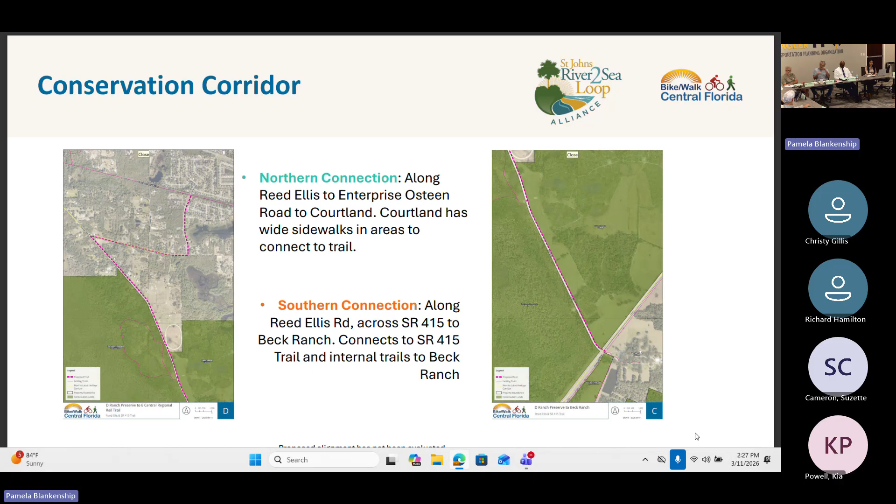I have a question. I know you live in that area - I'm trying to figure out exactly where Beck Ranch is in relationship to the overpass I'm very familiar with on 415. How many miles south, I guess, 3 or 4 miles? Yeah, it'd be south of it, very close to.

So here's the bridge up here, here's the bridge right here, and here's another underpass down by the canal, down by the river. Come all the way down and connect to it and then go back - that's 6 miles round trip probably.

And then celery, what I was talking about earlier - this is celery. This is currently under construction for a trail that will connect to the wide sidewalk at that intersection and connect to 415 and north. That'll be much welcomed - we were all very happy when it broke ground. I served on the Seminole County Parks and Rec Advisory Board, so I helped prioritize that trail.

Thank you. You're welcome. All right, any other questions? No. Okay, good job. Thank you.

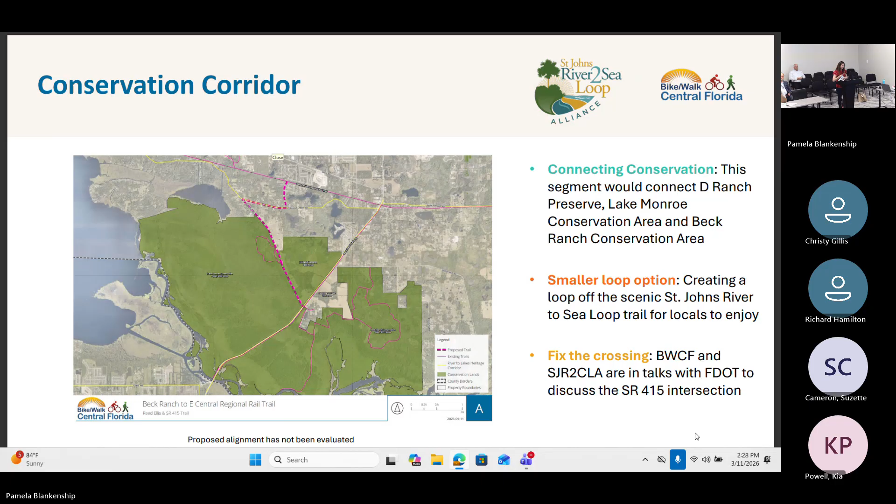Thank you. Our next presentation is by Todd. Oh, you did say you're doing two. I did, sorry. Do you want to sit down? No, no, stand up. I mean, I can be as formal or informal.

Okay, I'm going to run right into my second presentation then. This is an update on the Best Foot Forward Pedestrian Safety Program that is being administered in Volusia County and Flagler County. The Volusia County program right now is funded by FDOT. The Flagler County component of that program is funded by the TPO. So thank all of you for making that a priority.

And we're doing some really great work in Flagler County, and I can't wait to share with you what we've been up to. So if you're not familiar with our program, I'm going to give a quick overview.

This program was designed based on a high visibility enforcement on driver compliance with pedestrian right-of-way laws study back in 2013. What this NHTSA study basically looked at was how engineering, enforcement, and education could improve driver compliance at marked crosswalks, basically stopping for people to let them cross the road as the Florida law requires. We do all of these components as well as evaluate the driver yield rate, and I will go over how we do that in a minute, but all of that is compiled into the program.

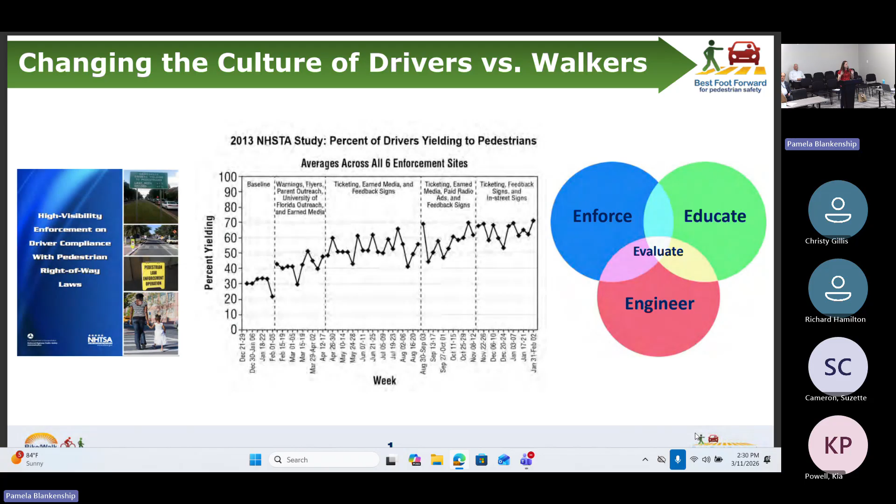So we use those 3 E's and that 4th E to determine which enforce, educate, or engineer we need to more focus on to get drivers to stop for people in marked crosswalks.

We are doing this now in a very large footprint. We started out in Orange, Seminole, and Osceola counties originally, then grew to what you see is the northeastern expansion. So this year we're all the way up in Jacksonville. Very excited. And we are all the way west as Polk County. Maybe Tampa will be our next region, not really sure.

But here's all the people that we work with. We bring together people from Public Works, Transportation Planning, our law enforcement partners, school districts, the health and advocacy groups that need to be a part of this, and really anybody who's interested in pedestrian safety, regardless of what your profession or what you might be working on.

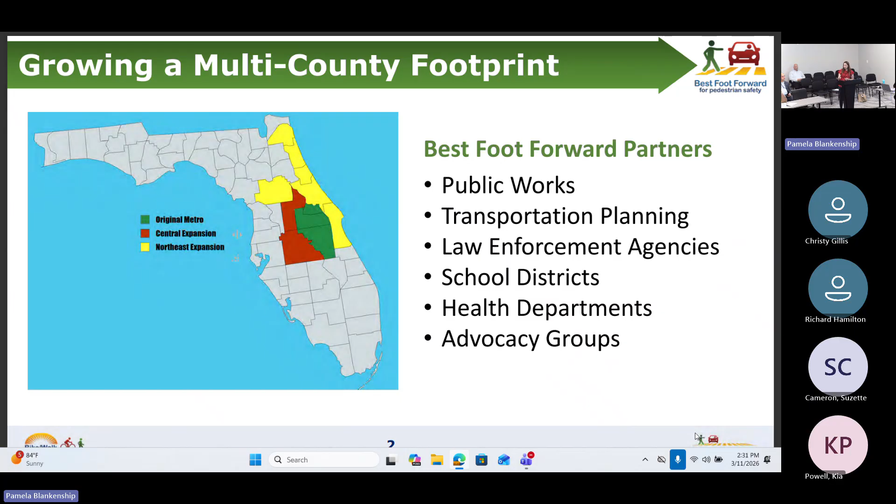So we bring all of these people together to have these robust conversations, talk about the data, talk about the recommendations and options, and it's those program partners that really guide how our staff and we use our resources to give the information back to the partners that they need to improve driver compliance and pedestrian safety.

So our evaluation methods are pretty simple. We put our foot in the crosswalk to show intent to cross the road. We do so by marking and flagging out what we call our dilemma zone, which is our safe stopping distance. So we don't just jump out in front of cars. That's super dangerous and against the law.

So don't do that. We mark out either with a flag, or if it's been properly designed, it has advanced warning signs that meet these distances, and it's based on the speed that's posted. We tend to give drivers the benefit of the doubt and push that out 5-10 miles per hour. So we'll extend that even so to make it very obvious and give the driver plenty of time to stop for us. But we head out, put our foot in that marked crosswalk.

Driver can do one of 3 things. They either stop for us and patiently let us cross the road. They slam on their brakes and they're like, oh my God, someone's there. Give you the finger, the nice wave, either one or both, right? Or they just blow right by you, right? We've all been there and experienced probably every single one of those scenarios.

So our data collectors mark that down. They mark whether or not that driver had to hit their brakes and had a short stop, whether or not they gave the pedestrian plenty of room, right? You hate to feel that car on your leg as you're walking or your body, right? So how much space did they give you?

Then we'll take observations of other users in the area. How many people are walking? How many people are biking, using other types of devices? Where are they crossing? Are they using the crosswalk? Or are they mid-block crossing? So we look at all the various factors. What are the land uses around there?

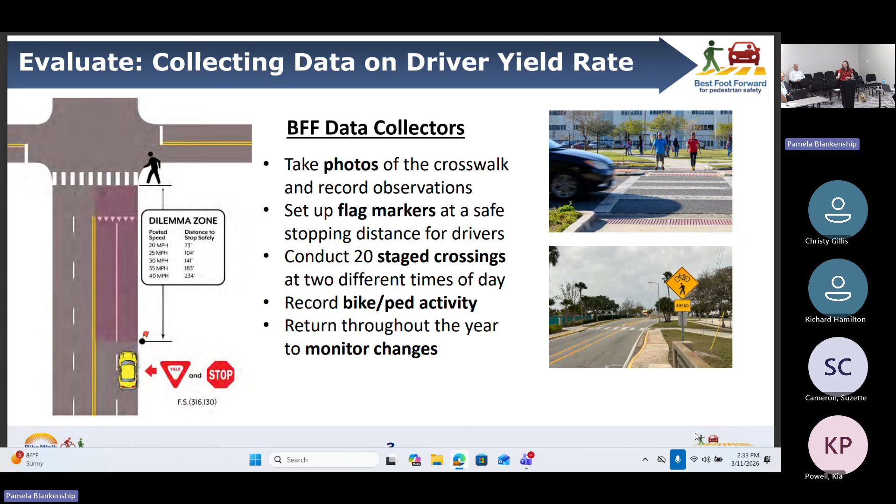So I'm going to give you some insights on the program. This is program-wide data. We monitored over 100 crosswalks across the 7 counties that we were operating in last year. And of those, I'm going to go through some of our engineering highlights. I also have education and enforcement highlights for you all as well.

When you start with delineator posts near crosswalks, it was the most effective low-cost engineering solution that improved the driver yield rate.

On average, almost 30% improvement with little flex posts. Super simple, but that vertical deflection, that vertical piece of plastic makes you go, whoa, I need to slow down, I don't want to hit that. And so that's why we're seeing those increases in the driver yield rate.

We've also had a lot of partners see that the partners that piloted this originally, these flex posts aren't getting struck like a lot of naysayers would say, oh, I've got to replace them all the time. That's not what we're finding. What we are finding, though, is that it's a great, cheap solution to help protect people and increase the driver yield rate. So we're using this more, and partners are recognizing that, starting to install them more and use them more in those areas.

Speed humps ahead of the crosswalk actually have a higher driver yield rate than raised crosswalks themselves, because the driver is slower, recognizes that someone's there, and is more likely to stop than if they were already heading over that hump. We've done this now in 4 different locations at, I think, 6 or 8 different crosswalks - I need to verify that. But we now have enough of a sample size to know that the speed hump ahead of a crosswalk, instead of the raised crosswalk, is really the way to go. Downtown Kissimmee has that, so that's a really great place to look at a before and after example. And then by beacon type, we were able to really pull out all the data to show which one's effective and which ones are not.

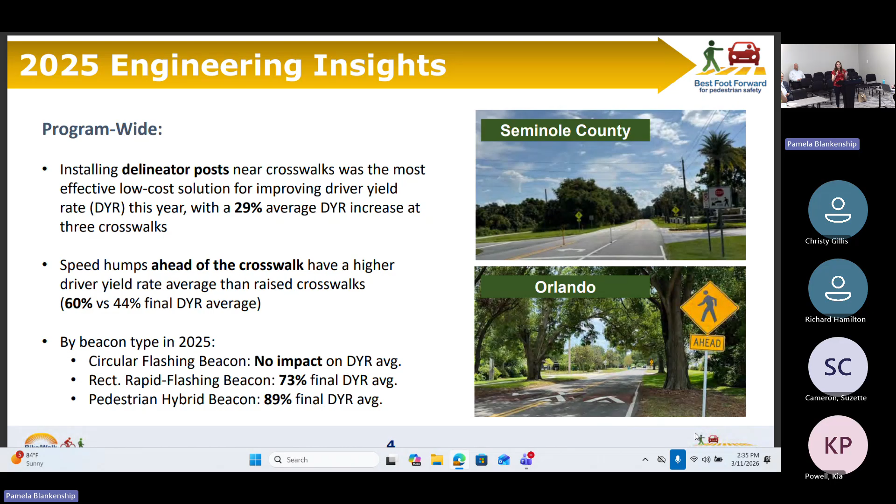I'm not sure where you all have one here - I know there's one in Seminole County and several in Orange County, one in front of Mainland High School, on ISB. So these are more prevalent, coming more to FDOT's toolbox to be used to get people across these state highway systems safely.

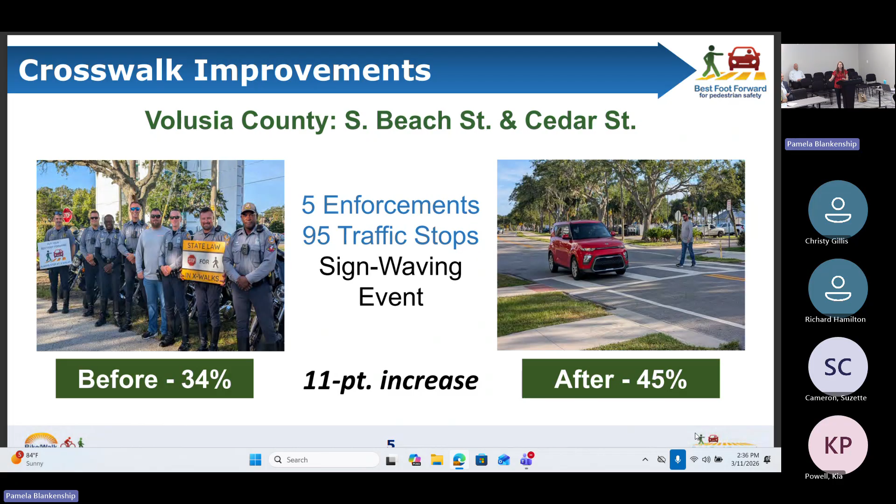We have been monitoring South Beach Street and Cedar Street. This had 5 enforcements with over 95 traffic stops, and a sign waving event was conducted here. When we started, we had a 34% driver yield rate. When we ended after doing all of that work, it was at 45%. So just with enforcement and sign waving, we were able to increase the driver yield rate - no engineering necessary, just some boots on the ground, literally and figuratively.

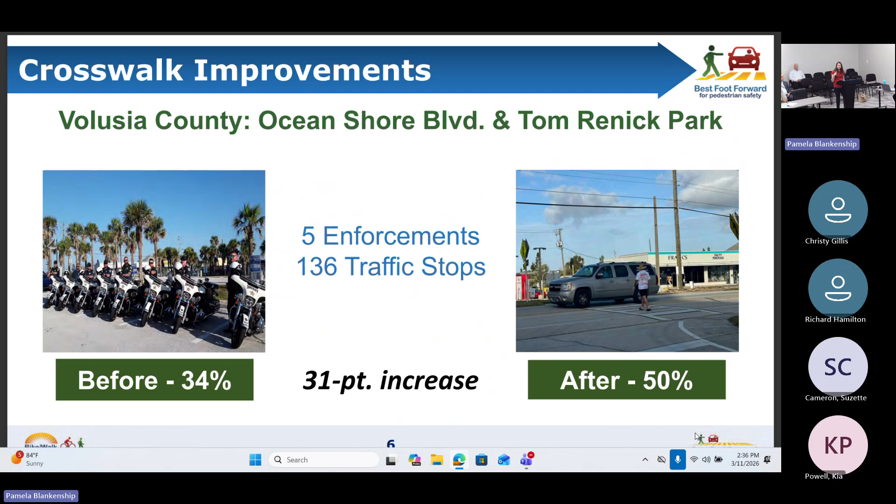Over at Ocean Shore Boulevard and Tom Renick Park, Volusia County Sheriff's loves to enforce this location. They've done it 5 times and handed out a whopping 136 traffic citations or warnings. It was at 34% before, and now a 31% increase, because they've been consistently out there every enforcement. So hopefully drivers by now recognize that they've got to yield to people trying to cross.

Over in Flagler County, Ocean Shore and South 3rd Street has a PHB that was installed while we were taking data, so we got the before data. This is with the RRFB that was temporarily put in - that was at 63%. When they put in the PHB, it went to 91%. Yes, so the before and after numbers are the average of 5 samplings. Correct.

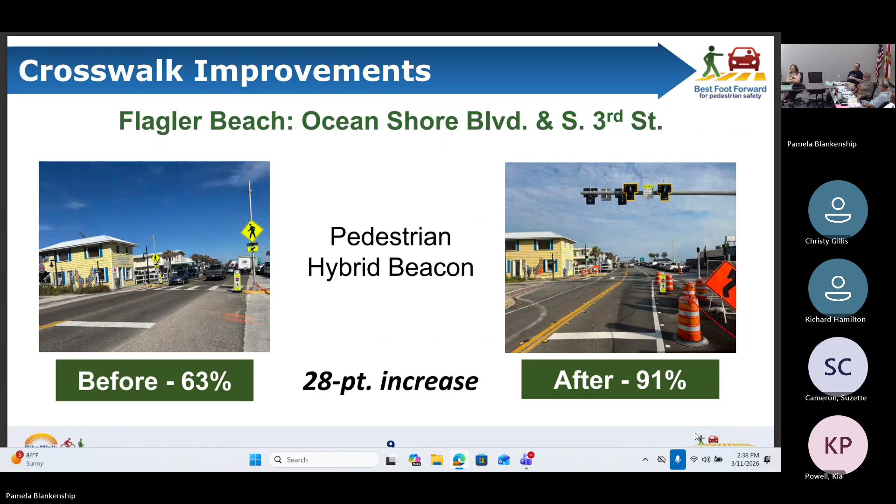So I did a bike ride this morning and I was at Old Kings Road and Town Center Boulevard. Right now that sidewalk is closed. It's been closed for three days, so you can't get from one section of the Lehigh Trail to the second section. We had to take the road and cross because it's shut down. I think that's pretty dangerous, but we had no choice because then there's the 95 bridge. You can't just go around it, it's pretty bad.

And then my second, on the same bike ride, we went to State Road 100 and Belle Terre, which is in the middle there. We crossed on 100, crossing Belle Terre, and that car was maybe less than 10 feet from the bikes. And that's a 4-lane crossing. They have a lot of notice that we're coming, but they're cutting in every chance they get. So it was not dangerous, but it was close.

I'll run through the project and take questions as we go or at the end, whatever works best. What I'd like to do is go through some of the improvements we're making out there—a lot of safety improvements for all users, pedestrians, bicyclists, drivers. As you know, we've got a lot of students out here, not just Embry-Riddle but Mainland High School, so we're doing a lot to improve safety.

Project overview: we're going to mill and resurface the road from Beville Road to Mason Avenue. If you're familiar with it, there are some patches desperately in need of new pavement. From International Speedway—let me back up a little bit. In order to take advantage of the funding and leverage our ability to make these improvements, we're producing 3 separate construction projects, chopping it up into smaller pieces, which I'll go through.

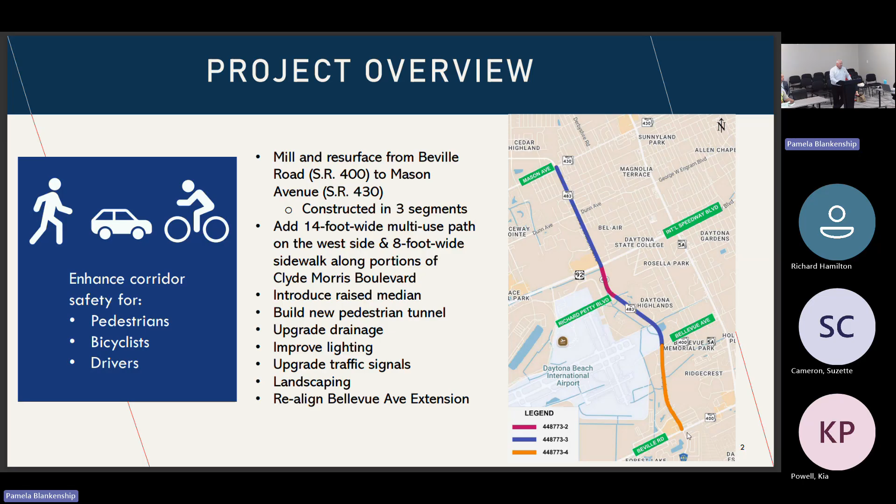I'll walk each of you through the different segments. Generally speaking, from International Speedway to Beville Road, we're adding a 14-foot multi-use path on the west side of the road and an 8-foot sidewalk on the east side. We're reducing lane widths in some cases down to 11 feet, putting in raised medians, doing landscaping, upgrading traffic signals to mast arms, and bringing pedestrian push buttons at all signalized intersections up to current standards, along with ADA ramps. We're also adding a pedestrian underpass at Embry-Riddle Aeronautical University—rather unusual for this part of the country, but we're going to do it.

We'll be keeping the overpass as well—yes, they will keep it. The ROTC has to use that, from what I've been told.

As I mentioned, we're breaking this into 3 separate segments. The first segment is from Richard Petty Boulevard to International Speedway Boulevard. The canal on the west side there, by the Embry-Riddle parking lot, used to be their backup or practice soccer field. We're going to pipe that canal, and once it's piped and covered, we're going to put in a 14-foot trail along that whole side of the road from International Speedway up to Richard Petty.

We're going to reconstruct the signal at Richard Petty—it's string pole now, and we're going to use mast arms there, and upgrade all the pedestrian push buttons. While we're doing that, we're going to work with the City of Daytona Beach and Florida Power and Light to relocate some utilities where the tunnel's going to go, which is in Segment 2, so we want to get ahead of that in advance.

Our current schedule: we're going to open the bids in fall of '26, so sometime after late summer, early fall. We hope to get construction started—I've got a slide later that shows the construction sequence—but we're going to try to get under construction by December of this year. The current estimated cost for construction is $9.8 million.

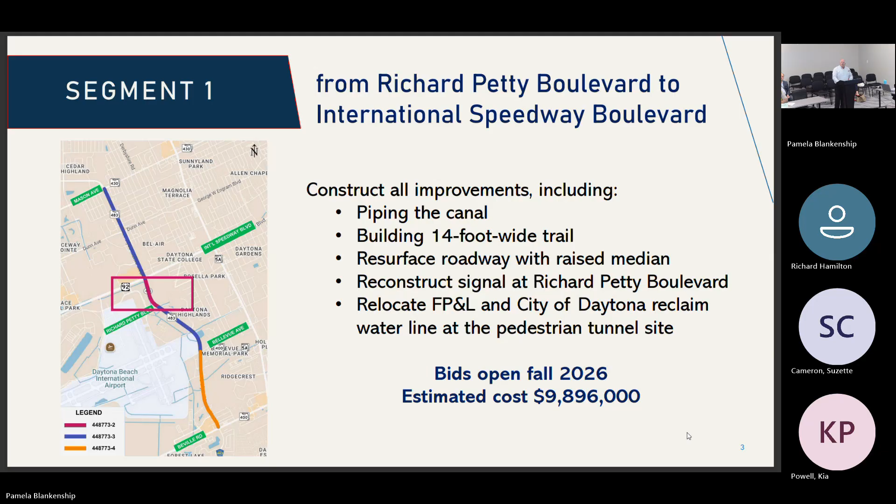Segment 2, we broke it up into two pieces for presentation purposes, but it's one project. Segment 2A is from Bellevue/Aviation Parkway to Richard Petty, so we're closing that gap. A lot of the same features are going in there: the 14-foot trail on the west side, the 8-foot sidewalk on the east side, resurfacing the road, and adding curb and gutter where it's currently a rural section.

We're building the pedestrian tunnel at Embry-Riddle. We did a pedestrian count there a couple months ago—one count on Tuesday and one on Wednesday. Tuesday we had near 1,500 pedestrian crossings at that main intersection, and Wednesday we had almost 1,700.

That count was from 8 a.m. to 4 p.m. because most students are done by then, though as you know there are nighttime events at Embry-Riddle too, so there's a great need. This is probably one of the busiest pedestrian intersections I've seen in the district—I can't say for a fact it is, but I don't know if I've ever seen 1,700 pedestrians crossing from 8 a.m. to 4 p.m. So you can see the need.

Also, last October, unfortunately, 3 students were hit at the crosswalk. They were in the crosswalk doing the right thing, and unfortunately a driver went through the red light and struck them.

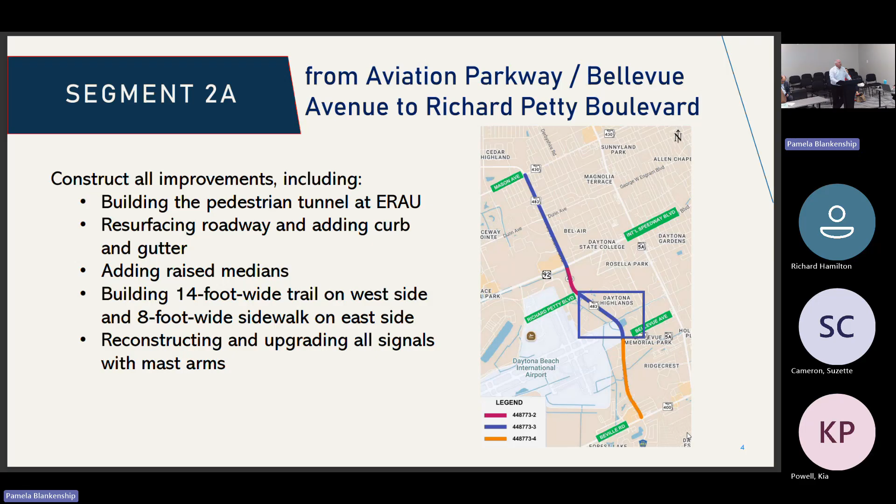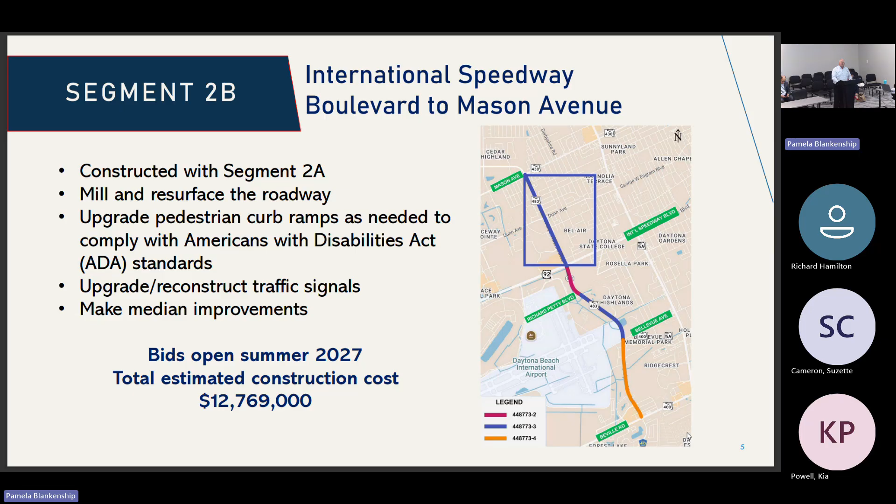This is a very important project to us and the university. Segment 2B is from International Speedway North to Mason Avenue. We're doing median improvements up to the hospital's main entrance, and more sidewalk from where West Marine is, from that gap up to the intersection. That won't be 14 foot, but it's sidewalk improvements, closing in that little bit of canal right there, upgrading the traffic signals to two mast arms, and milling and resurfacing the road all the way up.

This is about where the tunnel is going to be, looking north to the pedestrian overpass. You can see we're narrowing the lanes a little bit. What we're not showing is the 14-foot path on the west side — please trust me, it's going to be there. This graphic was done a long time ago; we're working on new graphics. And then there's the 8-foot sidewalk on the right side, 11-foot lanes, and of course landscape medians.

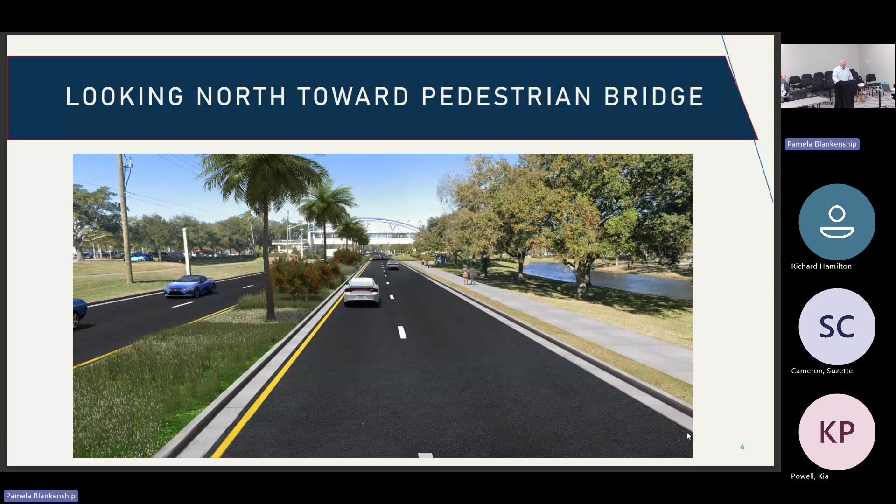I think you said there's a pointer here. Was that the red button?

We're also working with the college. We may, or they may, make another pedestrian connection over to their main parking lot, although it's less needed.

Yes ma'am — the incline into and out of the tunnel, thinking of somebody in a wheelchair. It'll be your standard ADA ramps: it'll go down, then flat surface, down, flat surface. So yes, we're definitely meeting all current ADA laws.

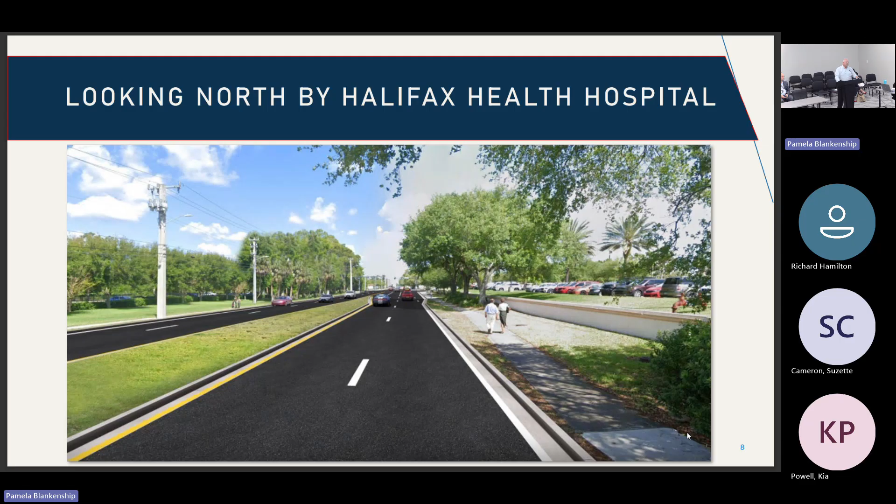I should mention too that we're doing corridor lighting throughout. We'll be doing the design with Florida Power and Light, and we'll be installing the lighting.

Segment 3 is the last segment, from Beville Road up to Aviation Center / Bellevue Avenue — same typical section, if you will. We're going to resurface the road, add curb and gutter, and put in raised medians for landscaping and to define the turn lanes better.

We're going to put in the 14-foot trail on the west side all the way up to Beville Road, where currently no sidewalk exists from Hancock to Beville. This was needed a long time ago, but we're finally going to get to do this. And again, we'll replace all the signals with mast arms.

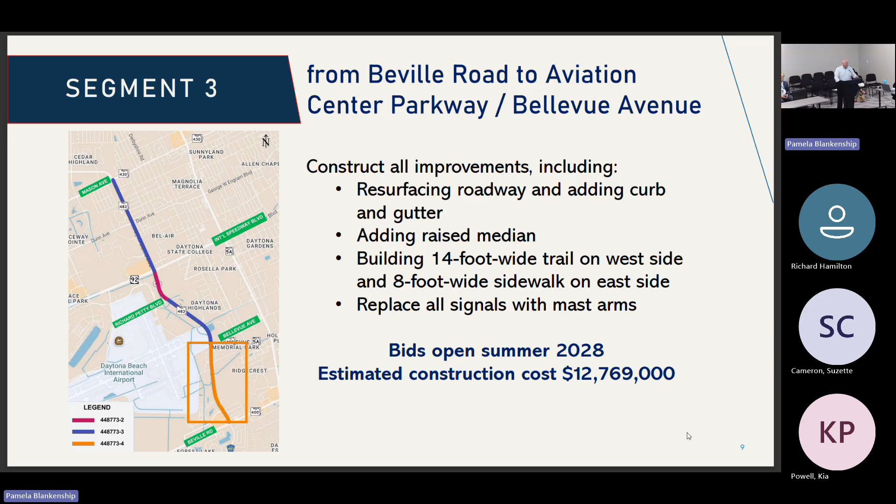This is just a little slide to show the sequencing. For Segment 1, we're going to open bids this fall and start construction — this says Q1 of 2027, but we're going to try to get started by December or sometime in December of this year. We don't know for sure how long, but probably 9 months plus, counting for weather.

For the full construction, by that time we'll be letting or opening the bids on Segment 2, which will take again almost 9 months to build the pedestrian tunnel and all the improvements. Then in summer of '28, we're going to open the bids for Segment 3. So for the driving public, it's going to look like one long continuous construction project, unfortunately.

But fortunately, we were able to get the money to do it. So there's a bright side, right? We can afford to do it this way. We just can't do it all in one time. And be honest, if we did it all in one, it's almost 3.5 miles. It'd probably take 2 or 3 years to build anyway.

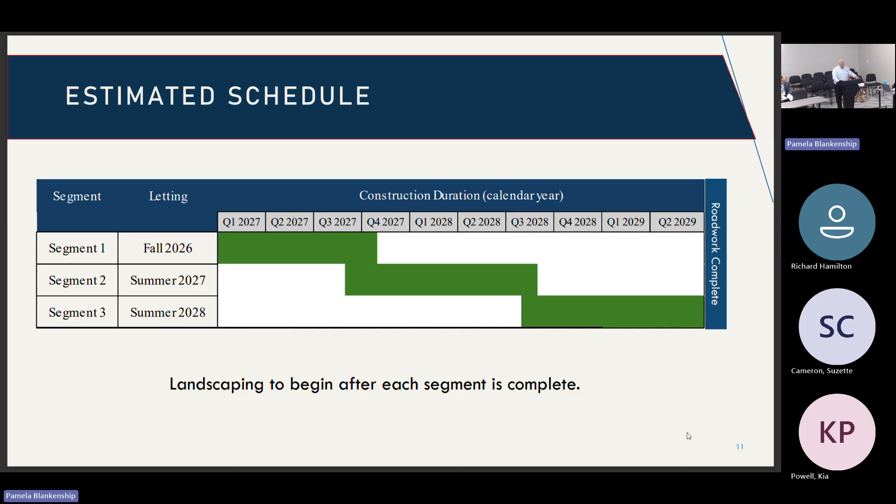Disruption, yeah it is. Good thing is we've worked with Embry-Riddle on access to the canal, so we're going to use their property. We hope to have our contractor not have to close a lane while they're piping that canal. So we're trying to work everything we can to make it easier on the public.

However, with our tremendous partnership with the city of Daytona Beach, Volusia County, and Embry-Riddle Aeronautical University, they're going to donate the right-of-way to us. So we were able to advance this by at least 2 years. So instead of seeing something in 2032, you're going to see everything complete by hopefully 2030. So that's very important. We cannot have done this without our partners, and it's greatly appreciated.

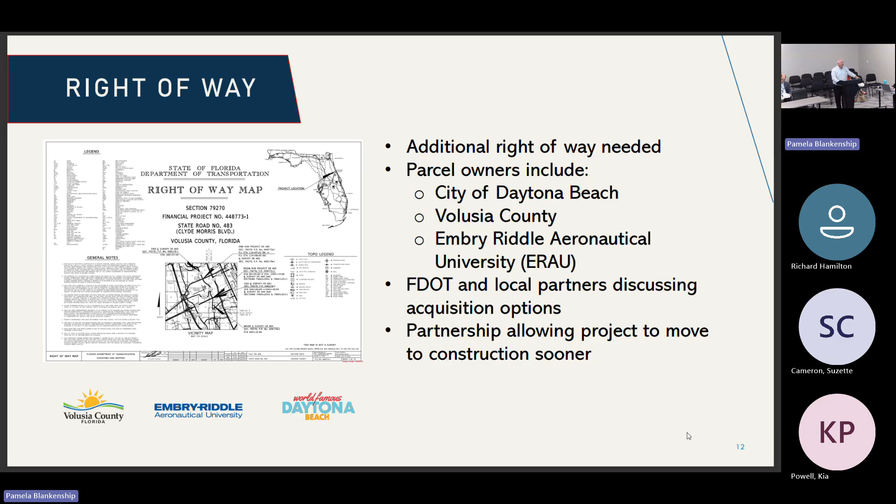I can go back to any slides.

I appreciate your time. Do you have any questions?

Thank you. I didn't have Emily's energy, but I wish I did.

I have a comment. That seems like a really fast schedule. The locals were used to the 50 years to widen the road. Yes, growing up here, so that's good.

It's a fair statement. That canal brings back memories. When I was a student there, we'd have tug of war, 15 people on each end of the rope, drag the other side through that canal. A small anecdote, the campus moved up here in the 50s, right? They were down in Miami, and my dad helped bring them down. So did my father, he worked for Southern Bell, and he and a whole crew of people, they loaded up every truck they could find, any trailer, any available human that was able to lift. And they took a Florida Highway Patrol escort down there. They loaded up everything and moved the campus here. Miami Airport, that's right. So, I'm sorry.

The Navy base right before it. Navy Air Base. Yes, you have a question?

Around, I'd be happy to. Talking about a different project, and I don't want to bother the committee. I'll do my best to make up an answer. I'm sorry, I'm kidding. Yes, I will stick around. Any questions on Clyde Morris?

Yeah, yes sir. So this tunnel, will it be gated and closed at night or? No, it'll be open. We're gonna put in, I can go back to that slide. I should have touched on those bases. There's a few points there because it is an important part of the tunnel project. If you can see on the slide, the little blue section there, including, of course, we're going to wrap it and do a tremendous amount of waterproofing so it doesn't get water intrusion from the walls.

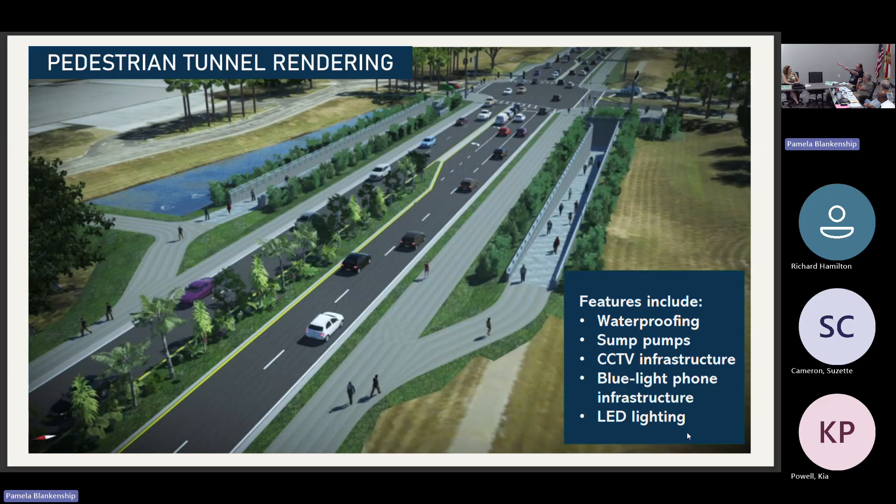The southern section, maybe the last section, has almost no current infrastructure on the east side. So it'd be nice if that was done first, then you recreate the west side, so you wouldn't interrupt the only pedestrian facility that currently exists. I take that to the grocery store, and if you worked on the west side first, there'd be no way to travel along Clyde Morris. I'll look at our MOT phasing and see how they laid it out, so the new stuff goes in first and we can use the old stuff while it exists. We'll do our best, just trying to think ahead on that.

The other thing is 14 feet is a lot of real estate, and with all these walkers, bicyclists, and scooters, in New York they'll break up these wide areas with a bi-directional cycle path and a place for pedestrians, giving people a place to be at different speeds. I don't know if it's possible to delineate the scooters, but they'll have an asphalt colored bi-directional bike lane on one side, then trees. We don't have that much real estate, but we could look at separating the uses with a different colored bi-directional bike lane, to try to get people to share better.

I'll get with our traffic engineers and see what we can do. There are nice sections in Brooklyn like that, where they have the street, the parking, the bi-directional bike lane, the trees, the sidewalk—everyone has a place to be. It's kind of nice.

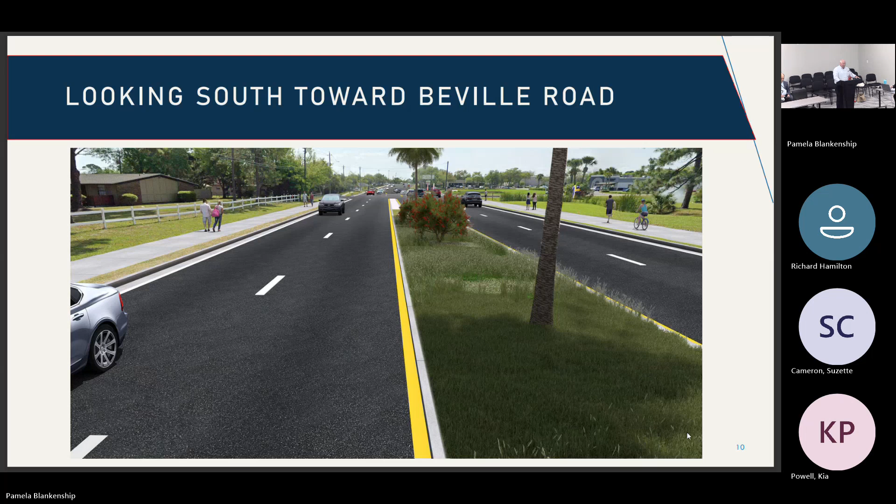Thank you. Hey, I'll stick around.

Staff comment: TPO staff will be in touch with members of the project review subcommittee to schedule a meeting to score projects received, either late this month or sometime next month.

Any other staff member comments? All right, there's a lot of information items in your agenda. Look at them at your leisure.

BPAC member comments, I'll start on my left side. I don't have anything to add, thank you to the speakers.

Hey Bob, summer's here. Well, I have a few things. I don't know how many people still get the print edition of the Daytona Beach News Journal, but in Monday's edition there's a picture of our own Victor Ramos. I was hoping he'd be here to get his autograph, but he's running for Deltona mayor. That's great—when I read the paper I said, hey, I know this guy.